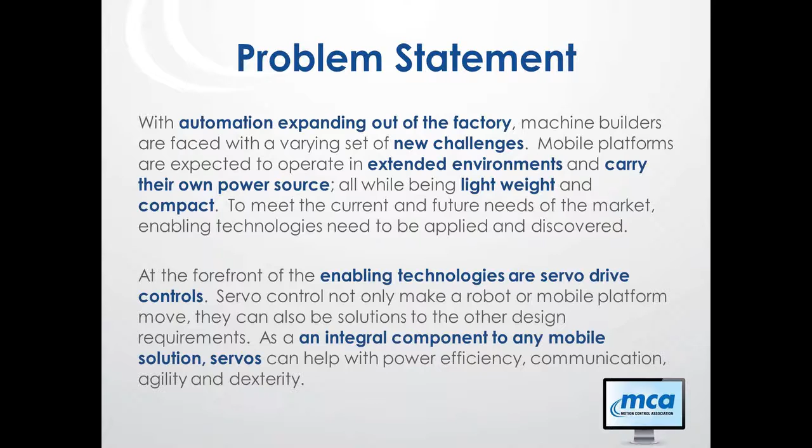The agenda I'd like to cover starts by defining what mobile automation is. It kind of describes itself - it's taking automation that we traditionally see in a factory setting and moving it outside of that controlled environment, whether that be in a desert, in Antarctica, or in a city, urban environment.

We'll highlight the challenges and lay out the pieces of the mobile system and look at those components. When we look at that, you're going to see it's a very complex system, and if you don't think about that in the beginning, how you're going to lay that out, it could really lead you down a trail where you're not going to come up with an effective or efficient design.

Next, I want to move into the bots that we see out there today and the solutions that Advanced Motion Controls and Electromate can provide, along with other people in the industry, and really how servo controls enable these systems to be functional and achieve the design goals.

Then at the end, I want to summarize the applications that we've highlighted and summarize the axes that are under control of servos, and then talk about the technologies - what are the technologies that are enabling progression in the industry today, and then what technologies are still gating our industry.

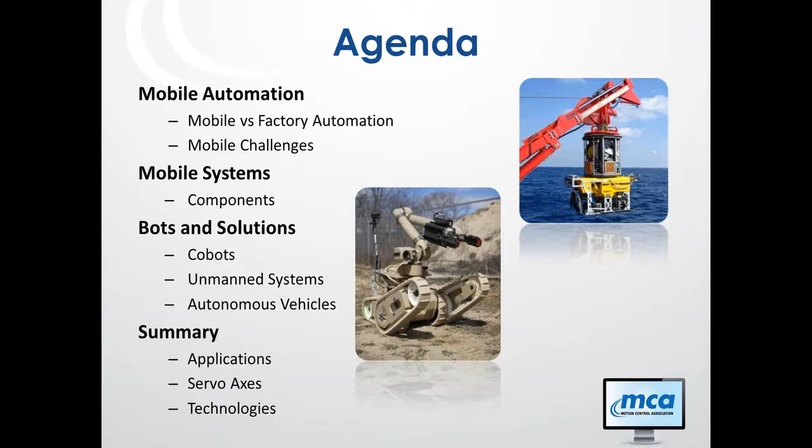Stepping back a little bit before we got to mobile automation, let's look at the evolution of machines. It really started out with people trying to make tasks easier or more efficient, starting with hammers and chisels, simple tools of that nature. Even if you look at a mill, using a water-powered mill to grind grain, that was your pre-industrial machines or tools trying to make tasks easier for humans or human labor.

Then we moved into the industrial revolution as civilizations became more urban and city-oriented, and food was much more readily available. People could focus on going to the store to get food and actually do other tasks during the day, not just making or collecting food. With that advent, we made these machines, and then we wanted to even make them more automated, and we got into kind of where we are currently in the industrial automation phase.

Then in the last 10 years, we kind of moved into taking automation and moving it out of the factory, and that's the piece we call mobile automation. If we think about it, farmers were really trying to automate their tasks a long time ago with tractors and combines - those are mobile platforms. But what we're talking more about is platforms that are electrically driven, not steam or diesel or gas driven. We're talking about electrically driven apparatus in the mobile automation market, and the advent of new battery technologies, efficient power devices, and processors has really spawned this marketplace.

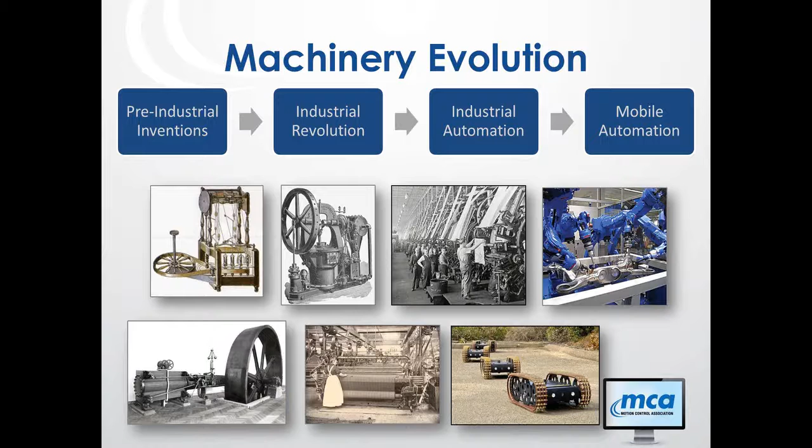We contrast the differences between a mobile environment and a factory environment. On the environment side, the mobile platform has to be transportable, so it's going to see a lot more shock and vibration during its transport and even during runtime. Whereas in a factory, most of the vibration or shock it sees is actually the machine inducing that onto itself or nearby machines. In the mobile environment, the shock and vibration comes from being transported in a plane, some military vehicle, or even just a standard vehicle driving on the road or a gravel road.

A lot of the mobile platforms go to very remote places on the earth, and with that you see large temperature extremes. In your typical factory environment, you see 0 to 40 or 50 C as a standard industrial environment - that's the extreme for a factory environment. In a mobile platform, we're looking at minus 55 to 85 C, which is really becoming the norm for operation now. We've seen applications down to minus 60 and up to 110 C, so that just continues to evolve. What else you also see from a mobile platform is altitude changes, whether that's deep sea or stratosphere.

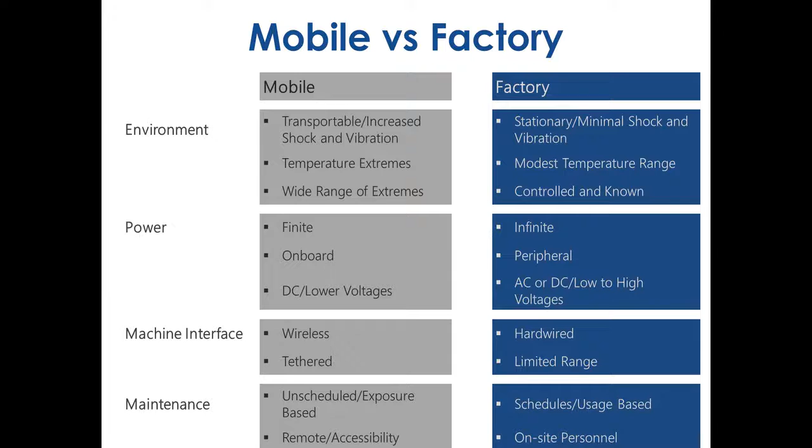And then lastly, kind of the maintenance. In the factory, you can schedule your maintenance. You have on-site personnel. In a mobile platform, it may not be scheduled. It might be something that happened because of the environment that it's in. It's more exposure-based. It's more reactive than proactive.

If you look at the components of a mobile system, you can see I got 12 blocks there. You may argue that there could be more, or there could be less. Not all systems need all these pieces. But what I'm trying to show here, there's a lot of components that you're trying to put in typically a very compact system. Most of your robots are trying to be as compact as possible, even as light as possible. They need to be transported, and being transported, if you can make it lighter, it's going to be more transportable. Also, it's going to be able to run longer with the batteries that you have on there.

On the left-hand side, we have our power management and our power source, and those connect to your servo drives and your controllers. Your controller needs to talk to sensors, whether that be cameras, infrared sensors, or proximity sensors on the bot, and the controller needs to have an interface to those different types of sensors. It needs to communicate to your servo drives, and the servo drive communicates with or powers the motor and gets feedback from the feedback devices mounted either to the motor or the mechanics. The motors are going to drive your traction or propulsion, or your manipulators or steering of your bot.

So if I put arrows on here or lines connecting all the different pieces, you can see that's a very complex system. And there are things that we can do to try to alleviate those connections or make those connections easier and more robust. If you buy all these components off the shelf, you're going to spend a lot of time designing wiring harnesses. That's going to take up space, and that's going to be cost in your system. If there's ways to combine those things together or get them closer together, that's going to alleviate some of that need for wiring. And every time you have a connection point, that's a point for failure. So the more we can reduce that, the higher quality bot we can make.

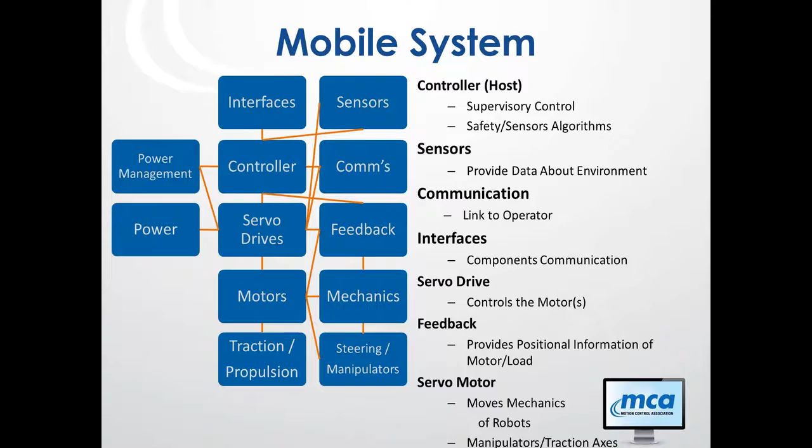Now I want to focus a little bit on the servo control. Really, what is a servo doing? The servo is the drive that controls the motor, whether that be the torque of the motor, the velocity, or position of that motor. And that is what controls your axes, whether that's traction or propulsion, steering, or a wrist, shoulder, elbow, or a gripper. That really, at the end of the day, is what is making your bot mobile and able to do tasks.

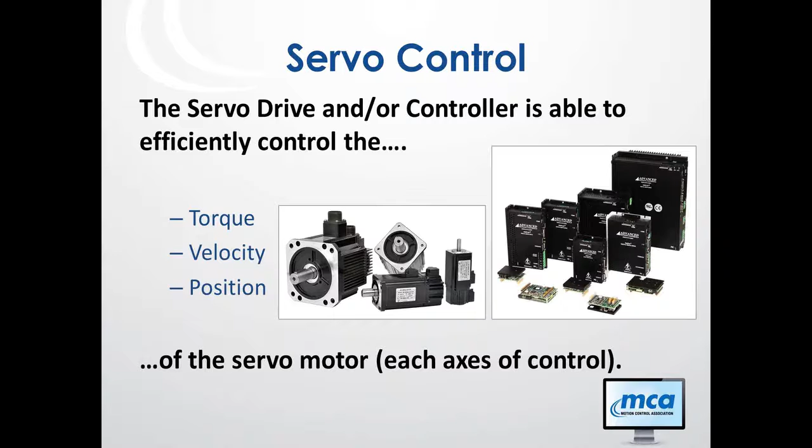Along with the servo control is you have the servo motor or AC induction motor. Primarily, you're going to be using permanent magnet servo motors, whether that be a stepper or a brushed or brushless servo. For larger loads, for AGVs, you may use an AC induction motor. It really becomes, when you want to move a very heavy load, or the bot itself is very heavy, that's when you use an AC induction motor. The AC induction motor is going to be less efficient than a servo or a stepper, and it's going to be larger, physically larger.

One thing that we can do at Advanced Motion Controls is we can deal with low inductance motors and high pole counts or multiple windings in a motor.

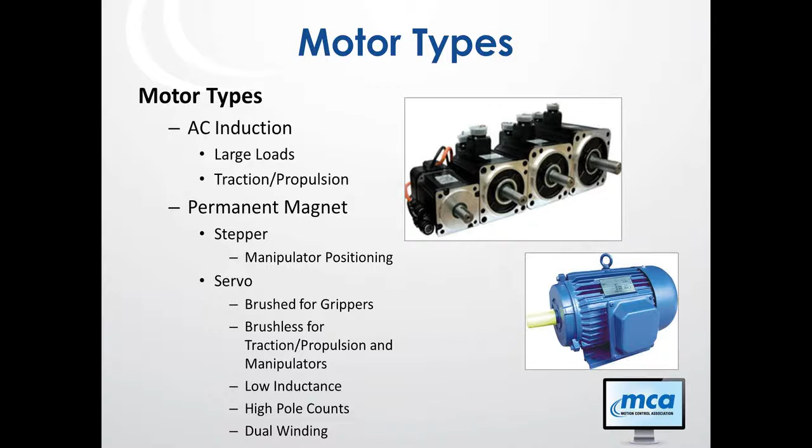Another really critical piece in your design is the power. Battery technology has advanced a lot in the last 10 years, and it needs to continue to advance going forward. Still today it's the big piece. How do we deal with that? We can put a lot of sensors on a bot and run a lot of algorithms, but that all takes energy. You're always making a compromise in your system on how many batteries you have, how many sensors you run, or how powerful your processor is. As battery technology increases, you don't have to compromise on your sensors or your processing power. So again, this is the enabling technology, but it's also a gating technology.

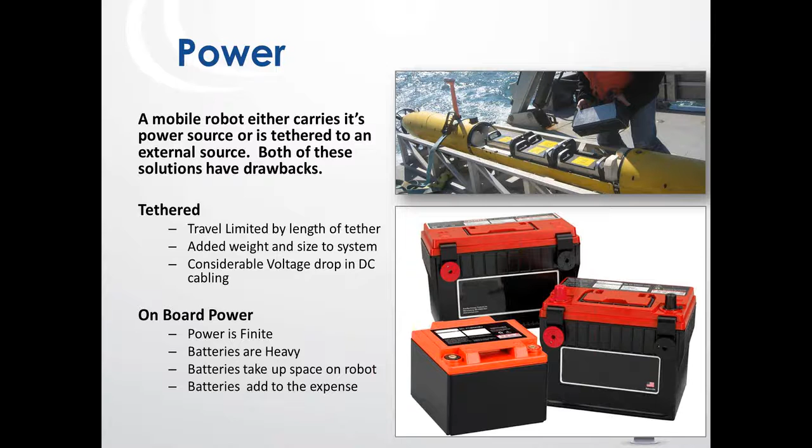Now, if we look at where mobile robots are being used, well, they're really being used everywhere. We continue in our application engineering group to get new applications all the time for where somebody's trying to use servo drives in applications outside of a factory that we've never seen before.

We've seen mobile automation in homes, office buildings, even your factories, automotive, distribution, warehouses, hospitals. It's a very big piece for mobile automation in hospitals or healthcare. Even on farms, where you're seeing bots specifically made for farming. We're also seeing retrofits on your traditional implements.

Warehouses, as I mentioned, even parking. Instead of going and finding your own parking spot in a parking ramp, you'll pull up, a bot will come underneath your car and go park it for you, and when you come back to the ramp it'll bring your car down to the exit for you to get in and leave. It allows for a much more efficient parking system and a more dense parking situation.

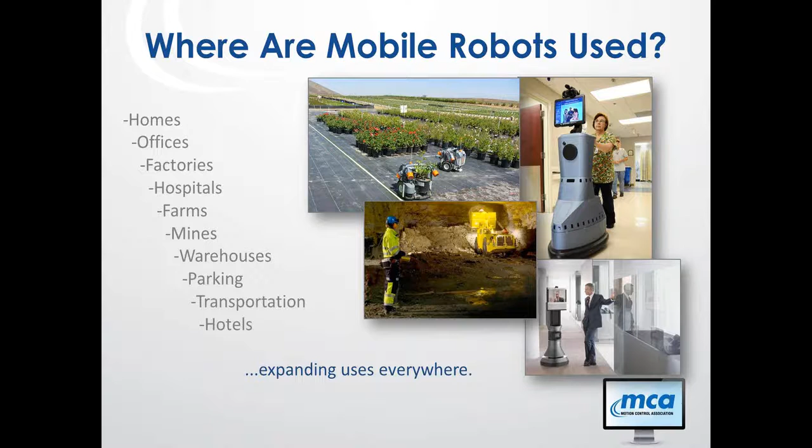And then also for transportation and for hotels, we're looking at seeing bots used for room service, bringing towels or a TV remote to your hotel room instead of having a person come up there.

They're using some wireless control where they can actually see the bot, or they may be in a different country or a different state controlling the bot. The bots also need to be able to communicate with each other. So that's a lot of information just there. How do we get all these pieces to communicate together? Is that a proprietary standard, or do we leverage open standards that exist in the marketplace?

A lot of the robots are used in what they call dirty, dull, dangerous environments that humans don't want to be in, or they may be critical operations, so the reliability needs to be very high.

Talked about the maintenance a little bit. Sometimes it's not scheduled, it's more reactive. So how do we make a design where we can easily pull out the piece that's not working and put in a new piece to fix it? Or how do you make it more modular so that you can have a base platform that's in charge of your traction, and I can put different manipulators or different sensors onto the bot itself to do different tasks?

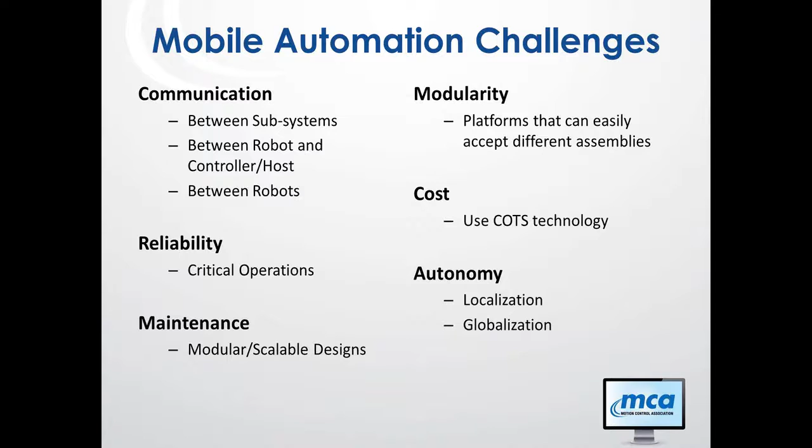Autonomy, this is always a critical piece for a bot. When it powers up, it's not always powered up, so how does it know where it's at?

Touched on this a little bit before with the slide about power. We're always going to be worrying about this power. Batteries are heavy, they're finite, so how can we enable that charge or that potential energy that it carries? How can we make the bot operate as long as possible with that finite charge? So we're going to look at efficiency of the subsystems.

And you really have to look at the whole system as one. We can't look at each subcomponent individually. We run into many applications where an engineer will go and design a very efficient motor, and to run that motor we got to add in inductors in front of it, and there you've really kind of shot that efficiency.

So a servo drive and a servo motor need to be looked at together, and how does that effectively operate? Again, you add a gearbox in. Is there a better way that you can direct drive that? You have to look at the whole system overall. If you just look at each subcomponent, you're going to potentially not achieve the results that you're looking for.

The traction. How do we deal with speed, acceleration, and climbing all in the same system? They're all really kind of fighting against each other. You may want your robot to travel at a rate of 10 miles an hour, but you also need it to climb stairs or climb a ramp that is going to take a minute long.

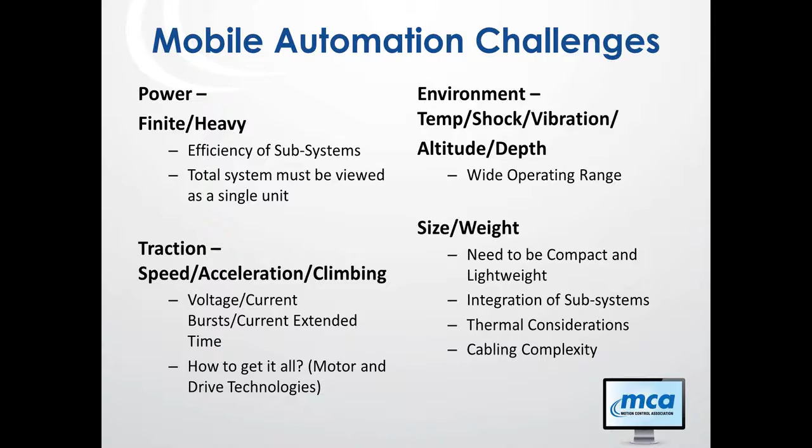And then thermal considerations. I want to put servo drives or controllers in an enclosed environment that's in a very wide operating range. How do I deal with the thermals and get rid of that heat out of there so it can operate? And then cabling complexity. How do we make that simple and robust?

Now I want to move into the types of robots that we're going to see, or that exist in the marketplace, or that are coming online in the marketplace.

The first piece that I want to talk about is cobots. So cobots is a relatively new term, used for collaborative robots. And what that means is you're having robots that are going to work in collaboration or conjunction with a human, whether that be teaming up with a robot to achieve a task, like the picture I show there in an automotive plant where you have a bot that brings the device to the operator to install in the car. It may be heavy. The robot may allow it to help line it up, and it brings the source material directly to the operator as opposed to the operator reaching over on a bench or a workstation to bring the part over to the vehicle.

We've seen in security, so that could be in a museum or an airport or a school. You have bots that will drive around at night to cover a larger area as opposed to paying multiple people to secure a campus. That same bot can also be an information kiosk or greeter during the day, so they can be multi-purpose. Material handling, we're seeing in hospitals where the bots are collecting the laundry and bringing the laundry down to where they can be washed and laundered. Also delivering supplies to the different levels in a hospital.

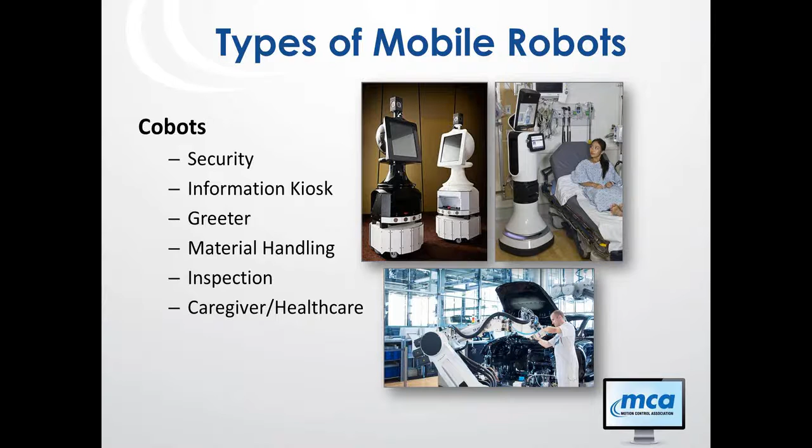Next piece here we see was unmanned vehicles. A lot of this was driven from the military side and oil exploration side. And we're looking at unmanned vehicles, which are UAV and UAS. So those are air vehicles or air systems. You have UGVs, which are unmanned ground vehicles. And the next one is a UUV, which is an underwater vehicle. And USV is a surface vehicle, which is on the water.

Then you have AGVs, which are automated guided vehicles, and then AGCs, which are automated guided carts. Cart and AGV are very similar, where a cart is typically going and it's a tug. It goes up to something else and hooks onto it and pulls that, whether it's a little trailer behind it or it's actually carrying the load on top of it. And then ROV is a remotely operated vehicle. So these are all just types of unmanned vehicles.

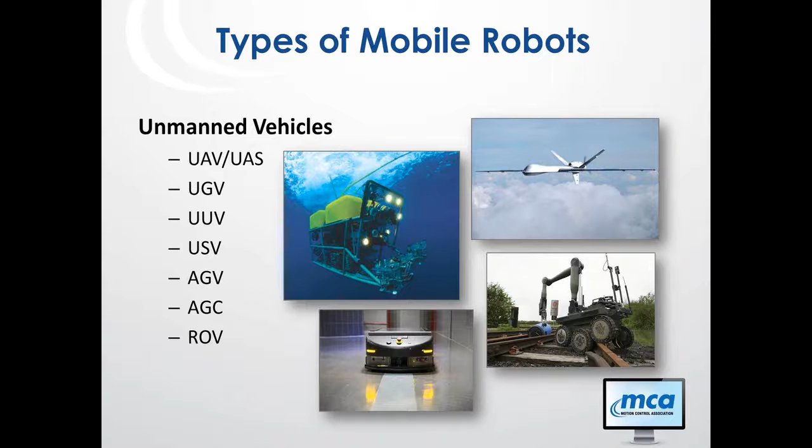The last piece that I want to talk about where classification is autonomous vehicles. So that could be a tractor on a farm or a nursery, cars. We keep hearing about these autonomous or self-driving cars. There's a lot of effort being put into making that a reality. We're seeing that in trucks, whether that's going to be trucks in a mine, very large vehicles where there's not people around. That's where they're first gaining traction, just like on farms.

But buses take a very simple route. They deal with the same route every day. So you're starting to see unmanned systems for that.

And then also there's retrofits. So a farmer may have a whole fleet of implements and they can't keep up during harvesting, so they can go and actually retrofit systems to allow harvesting to be done automatically. They bring the vehicles to the field or implements to the field, and at that point the implements run autonomously.

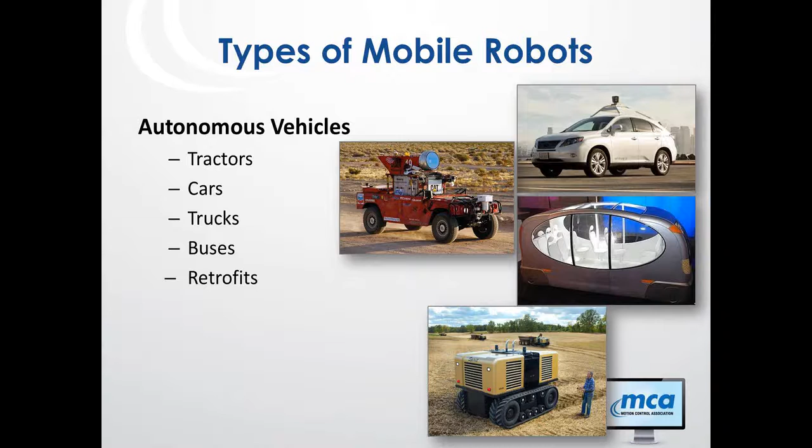So if we go in depth more into each one of these robots that I spoke about, and talk about where servos are used and what those needs are, and some of the solutions I have seen to solve the problems or challenges that these bots see. The first is the UGV. This is probably the most intensive from the amount of axes that you see on a bot or a mobile platform. I've seen bots where you have up to 8 or 9 different axes on there.

First, you deal with traction. How do you get the bot to move? Is that wheels or tracks? How do you steer the bot? Do you actually have a steering axle, or do you do it by turning the wheels or tracks in opposite directions? You have a turret.

You may have a base platform that is your traction, and you have a turret on top of that. And on top of that turret, you can put all types of different manipulators, and that is joints that could be a shoulder, elbow, wrist. It may not be all of those - it may only be an elbow and a wrist. You may have 2 arms on a bot. And then at the end of the arms, you have manipulators, whether that be grippers or hands, or different sensors or probes.

The big needs here are the shock and vibration that the UGV sees, and very compact assemblies. If you think back to that slide where I showed all the components of a subsystem, and you look at that bot on the picture there, where do I put all that stuff? A lot of that room in that bot is going to be used by the power or battery system. So where do I put all that stuff?

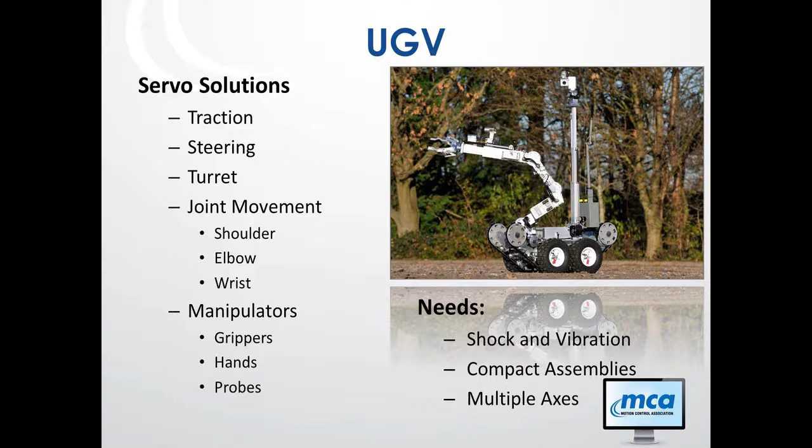I'm going to have to put some of the servo controls up near where the motors are, and that's going to be in the chassis or in the manipulator arm of the bot itself. And I'm dealing with a lot of axes, so it's going to be a lot of different wiring. So how do I help reduce that?

Well, what we can do is merge a lot of these sub-assemblies. Can we combine your servo with the controller? Can we take some of the power management and put that into one assembly? By merging these sub-assemblies, you reduce your wiring. You can make your connections with traces on the PCB, which are very reliable, cost-effective, and use less space than your traditional connectors and cabling harnesses.

And to really make that happen, you're looking at custom assemblies. You're not going to go find this off the shelf. You may find pieces of this off the shelf, but manufacturers are really not making purpose-built systems for robots. They're making purpose-built components, but not systems today.

Let me show you a couple of examples of how we've solved some applications. Both of these are 2-axis examples. The one on the right is an example where we're controlling 2 axes of traction, so each side of the bot from a traction side. And we also have control - the manufacturer or our partners, we put their control device directly on that assembly. So you have your controller, 2 servo axes, and some power management all in one assembly. And you can see it's very compact.

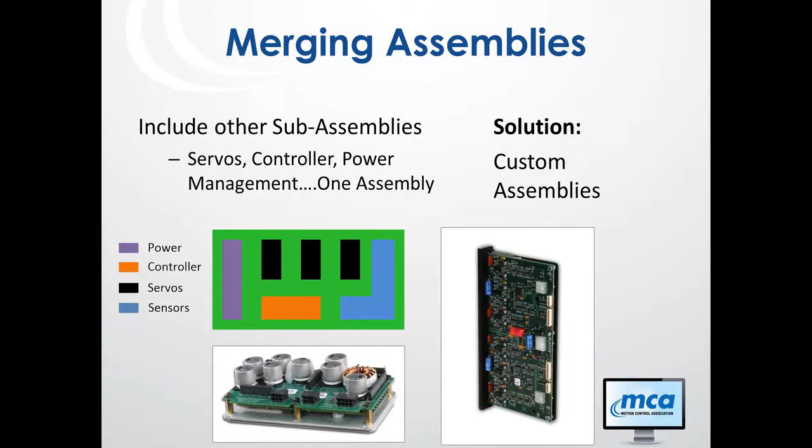Again, on the UGV we see a lot of axes. How do we do that? You do that by combining axes together on one carrier card, using what we call embedded drives. You plug these components that focus on motor control into a carrier card, and that carrier card can be custom built to fit inside your bot.

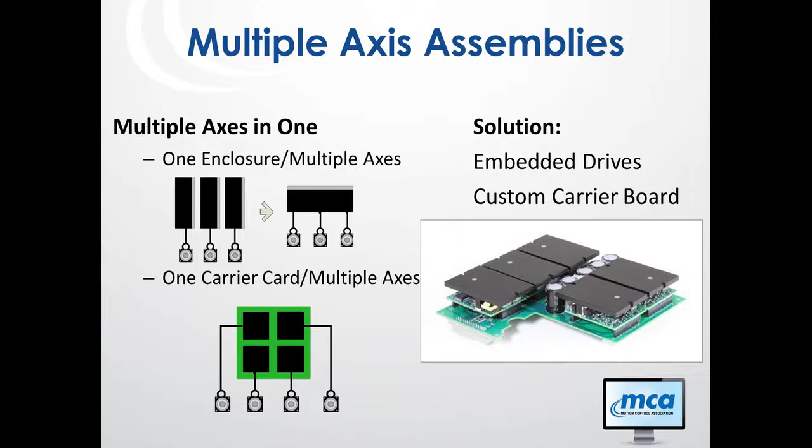The next piece we want to see is bots that deal with water, whether that's under the water, tethered, untethered, or on top of the water. There you're dealing with propulsion and control surfaces instead of traction. You want fins when you're underwater or on top of the water. How do you control the vehicle? A lot of times these have cameras on them. How do you control the camera? And again, you'll see arms and grippers just like you did with UGV.

A bit more of what you really need to focus on with these bots is the conformal coating. You're dealing with condensation or high humidity environments, salt water. You're also dealing with very high pressure environments. When you go deep under the ocean surface, you deal with very high pressures. How do your components handle that? How do you deal with air when it gets compressed? You need to think about that when designing that system.

Again, you're looking at very compact designs. There's not a lot of room in these bots that go very deep in the water. Much of the chassis is designed to deal with the pressure, so you don't have a lot of room to put in these other components.

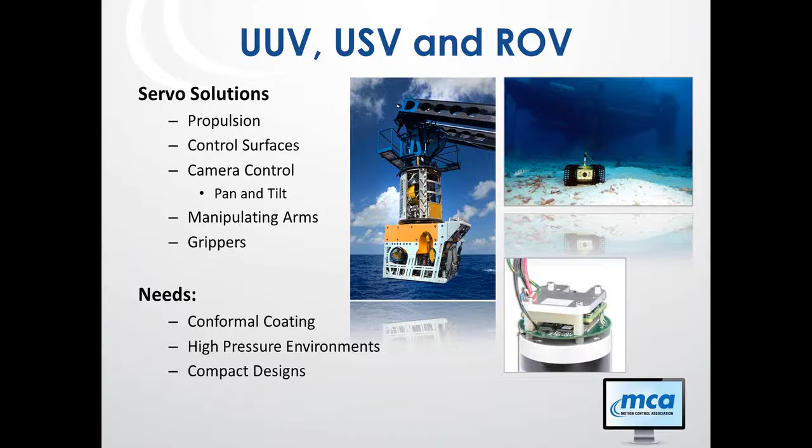What I show in the picture on the right are a couple examples of these bots, and then a picture where the drive is sitting actually on the motor in the back end housing of the motor, and that whole motor and electronics is sitting in a bath of oil, a non-compressible fluid, so they can go to very deep ocean levels and deal with those pressures so your components aren't crushed.

On the right-hand side, I show a servo drive in a circular fashion, mounted in the back end of the motor. That particular drive operates from -40 to 110 C. Not only does it have the servo drive control, it also has the controller and communications front end built in. So you're merging sub-assemblies, putting the servo right in the back of the motor, so all you have is wires going from the drive to the motor phases. The feedback is done magnetically, so there's no wiring for the feedback, and the only wiring coming into the motor drive assembly is power and communication. So you really minimize the wiring needed for this application, achieving the goals we've been looking for in a mobile platform.

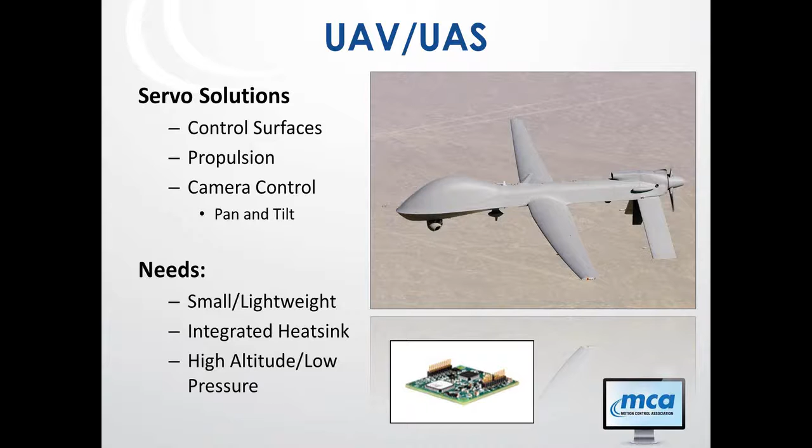We talked about different applications for extended environments. How do you deal with humidity and condensation? You can do that with conformal coating. There's lots of different conformal coating materials out there, and you pick that based on the chemicals it's going to see or the environment it's going to be in.

For shock and vibration, you want to keep your components on your PCB as low profile as possible. If you can't, a lot of times with capacitors or connectors, you may have to add adhesives or mechanical restraints on those devices. And lastly, pressures - how do you deal with these, whether low pressure or high pressure?

In a high pressure system, you can submerge the whole system or your electronics in a non-compressible fluid, like oil. In a low pressure system, how do you deal with thermal dissipation? There you start by making your designs as thermally efficient as possible, then there are ways to get rid of your heat after that.

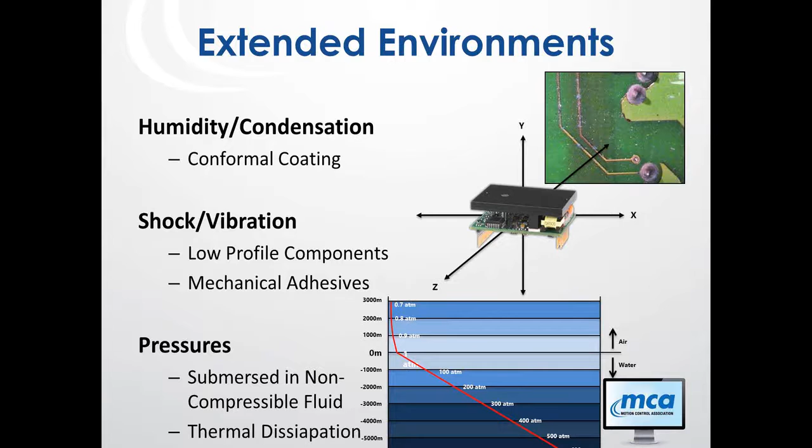Extended temp is by far the most requested feature that we see here at Advanced Motion Controls and that I hear in our applications group - how do we deal with these temperature extremes? We do that by using automotive grade components.

We also deal with high efficiency designs for power devices. Also, how do we keep the system intact - either dust or water out? We do that with plastic cases, gaskets, and connectors.

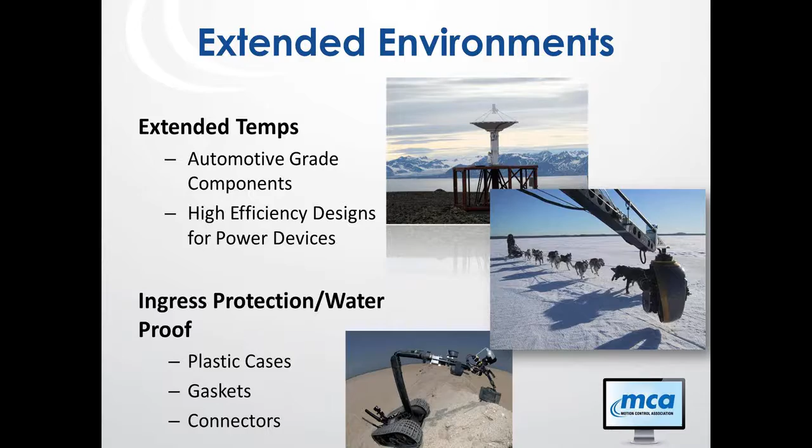If we look at an AGV and an AGC, I show a picture of an AGC, and also a servo drive, probably 6 inches by 8 inches, that does 250 amps on a 60-volt bus. When dealing with AGVs or AGCs, we're dealing with very large loads, and to do that we need a lot of power, large currents, but also need to be very compact.

This is the market where you'll see not only permanent magnet but also AC induction motors. What we can do on the drive side is make it very compact, and we do that by leveraging a lot of the metal that is the AGV and the AGC to dissipate the heat generated from the drive itself.

So that drive you see in the picture can't operate by itself in air. It has to be mounted to a considerable chassis member on the AGV. That's allowed because AGVs or AGCs are built with a lot of metal - they're very sturdy, they carry very heavy loads, and they carry a lot of batteries, so they need to be very sturdy and strong themselves.

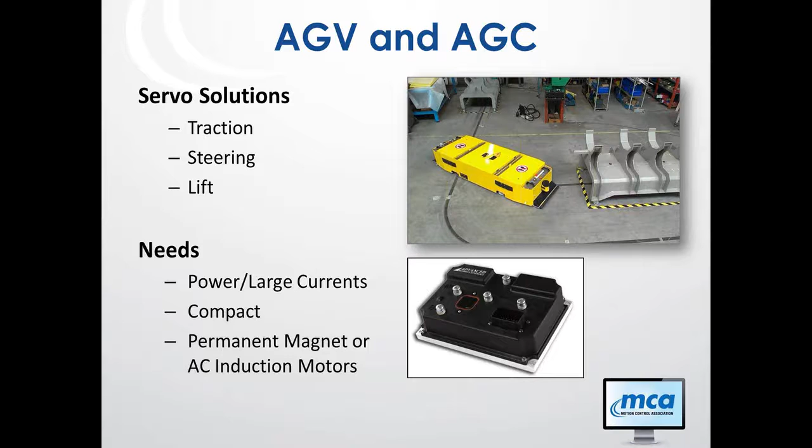The last piece we want to talk about is how do you make your system more efficient from a processing standpoint? Well, the servo drives have a lot of built-in capability already. So if you can offload some of the processing needed at the control level and push that down to the drives, you can pick a lower

end, more thermally efficient processor for the controller. You distribute all the motion control down to the drives, whether that's jogs, indexes, homes, or even having sequences or programs inside the drive itself. That really just allows you to reduce your part count, be more efficient from an energy standpoint, and saves in the overall volume of your system.

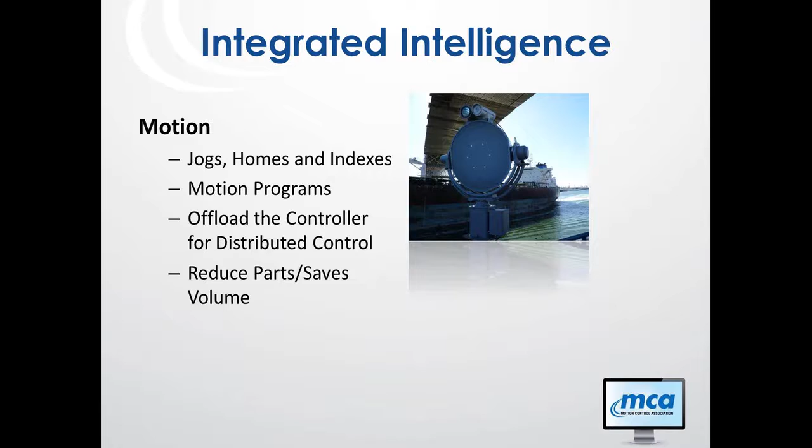Application summary, where have we seen these applications? It's military, homeland security, agriculture. We see a lot of it in research. We see bots being used in research in ocean depths that we can't get to, volcanoes, surveillance, reconnaissance, medical and healthcare, and then first responders. You can see there's a very wide range, and we've talked about that. For mobile automation, it has a lot of different challenges that it needs to answer, and each application may have some unique challenges that other ones do not.

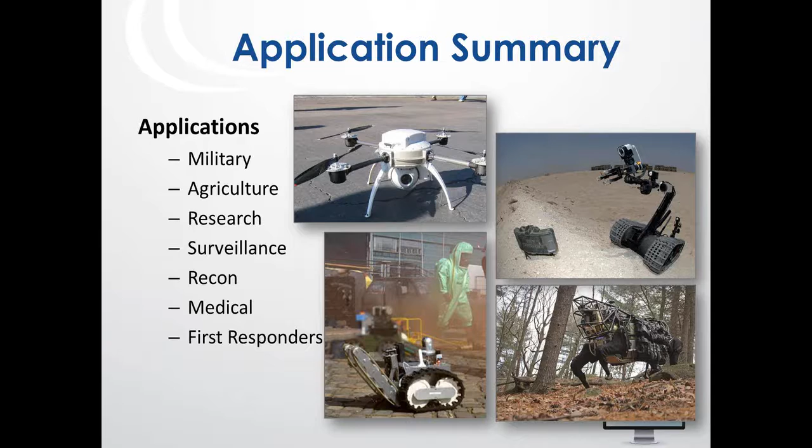Where have we seen servos? We see those in cameras, moving the bot, whether that be propulsion for water vehicles or air, traction for ground vehicles, the different type of manipulators that you see. You can see in the pictures that I have on the right, there's all different types of arms and sensors on these bots and different ways to get them to move. You have grippers, fingers. Each finger has a lot of different joints to move. You have your shoulder, elbow, and wrists. So there's a lot of places that servos can be used. In each one of those axes, you have processing power that can be leveraged.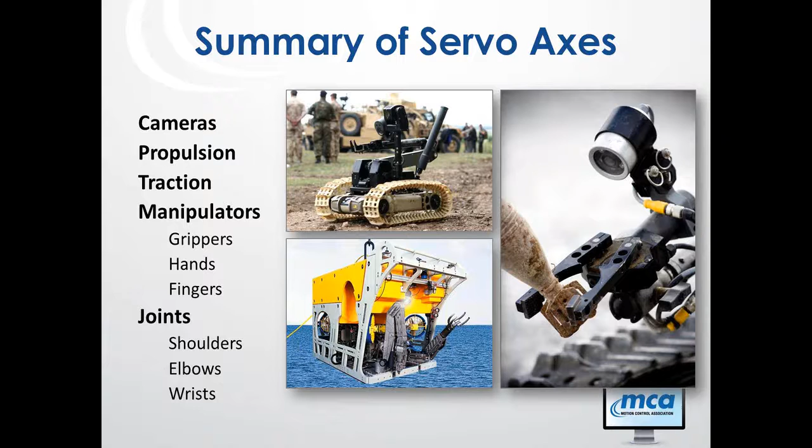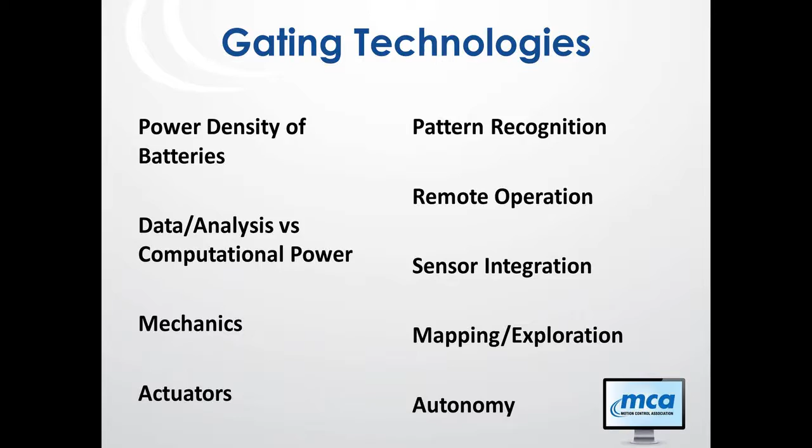It's the most efficient way to move your bot, and with that allows your bot to operate longer with its finite battery source.

The environment—there's a lot of components made for servo drives that allow it to operate in very extremes of temperature, shock and vibration, humidity, and pressure. We talked about earlier in earlier slides on how we can deal with those extremes in those environments.